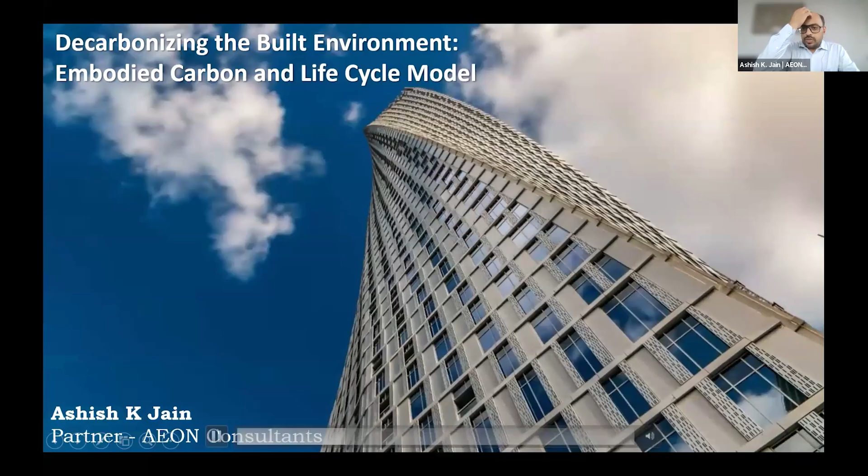I'm quite excited to hear all my fellow panelists here and the presentations which have been made. I think that's something which we all imbibe in the kind of work we are doing, and that's really the future which requires us to consciously think about things. In my presentation, the topic kept is decarbonizing the built environment and how embodied carbon and life cycle models are playing their role. That's what I'll cover.

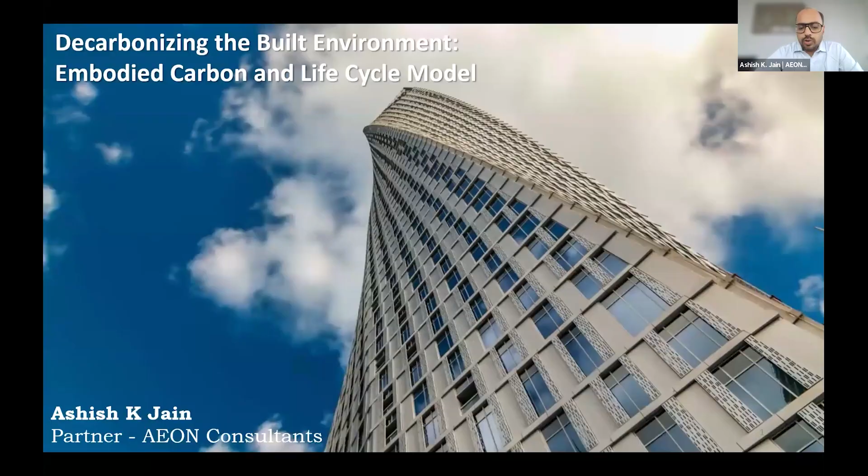Before I begin, we keep hearing about a lot of terms in this field of sustainability, and decarbonization is one such term which is quite extensively used, heard, and read at different places and forums and articles. It's important that as a community, we understand what it really means, the theoretical meaning of that, and how can we really use that in our projects.

So if you really go by what the word decarbonization means, it's a process of reducing CO2 emissions that contribute to global warming and climate change. We see a lot of these problems, which we've heard in the previous talks by the speakers also, the kind of problems that we are facing because of carbon emissions. And how do we remove them is what decarbonization is all about.

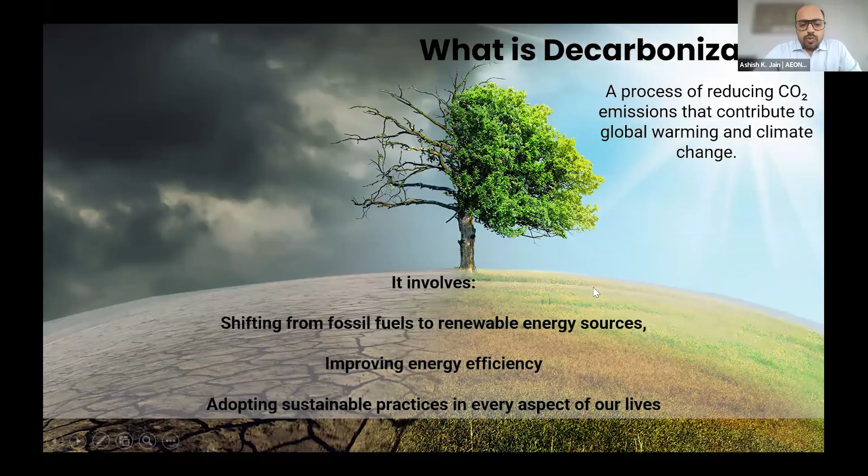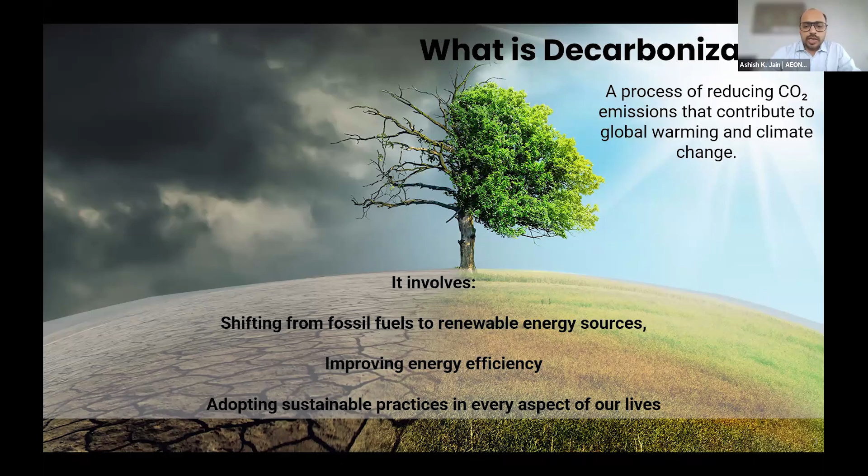When we talk of decarbonization, it involves shifting from fossil fuel usage to renewable energy sources. It requires improving energy efficiency first. So we heard about passive design, active design - all of those measures are really important to first of all reduce the consumption of our energy, which ultimately results in carbon as well. And then making sure that what we consume is more clean, adopting sustainability practices in every aspect of our lives. So of course we belong to the building, but buildings are one means of carbon emissions - carbon emissions happen in various aspects of our lives also, which is what we have to really see.

Now we may say, why do we talk about it and why does carbon matter a lot? Because these are some of the areas where carbon dioxide emissions are impacting us directly or indirectly. These are all the impacts of carbon emissions that we see. They're definitely contributing to global warming and the trapping of heat in the atmosphere, which ultimately is responsible for global warming and GHG emissions. We keep hearing about natural calamities here and there - those are somewhere related to all of these issues. High carbon levels also harm the ecosystems we have, not just human lives but the lives of all living beings. Biodiversity is being impacted, food security - a lot of these issues are there.

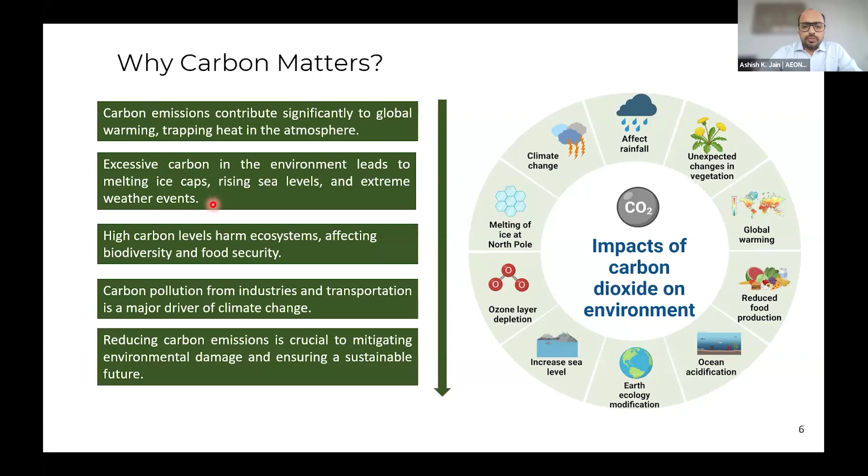Now when we look at the types of carbon, especially in a building context, there are two sets of areas to look at. One is embodied carbon and the other is operational carbon. Together they make whole life carbon - that's the overall concept that is required to be addressed properly. Embodied carbon, what you see on the left-hand side, is basically to do with a lot of the material selection and usage that we have in the process of building construction, while operational carbon is more to do with how much emissions are there in the operational part of the building. Embodied is related to the materials, manufacturing, transportation, and installation of all the materials, and operational is more related to the amount of energy consumption we have in the building.

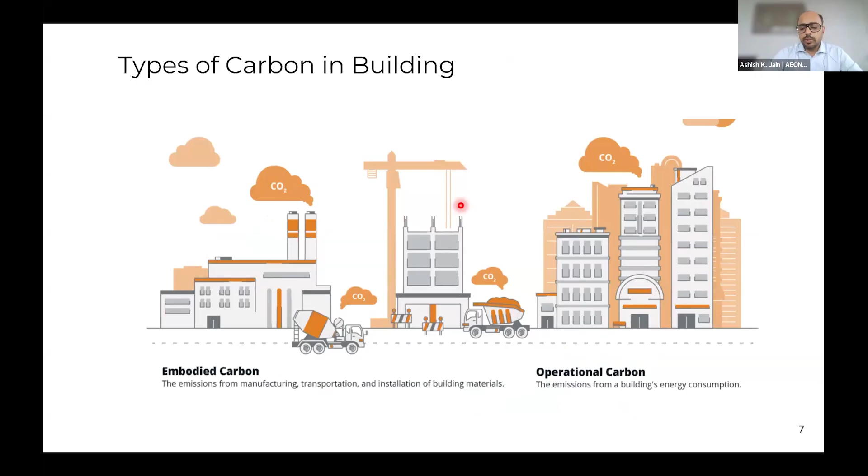When you look at embodied carbon, which is one key area of a lot of focus for any building, it's important to understand that between embodied and operational carbon, we still have leeway to manage operational carbon during the entire operational phase of the building. But what we build today is going to last for the next 40, 50 years for any building. So embodied carbon - whatever we consume today - is going to last for the rest of the life of the building. So it is very important to deal with embodied carbon first, and then of course look at operational carbon also.

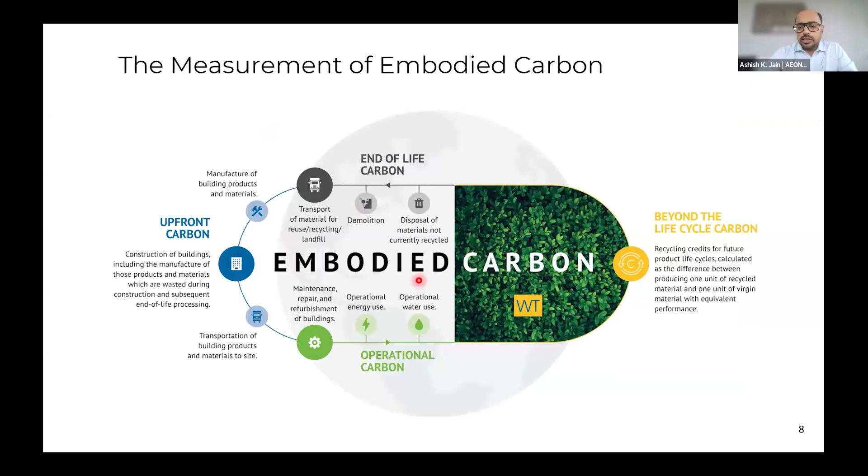Fortunately or unfortunately, there is a lot of work which is yet to happen in the embodied carbon area. There are a lot of materials present, but they may or may not be adequate enough to address all the building requirements for all types of buildings. Accordingly, we have to see and choose the kind of different materials which can be suitable to our requirements, and see what benefit we can bring in to the embodied carbon reduction.

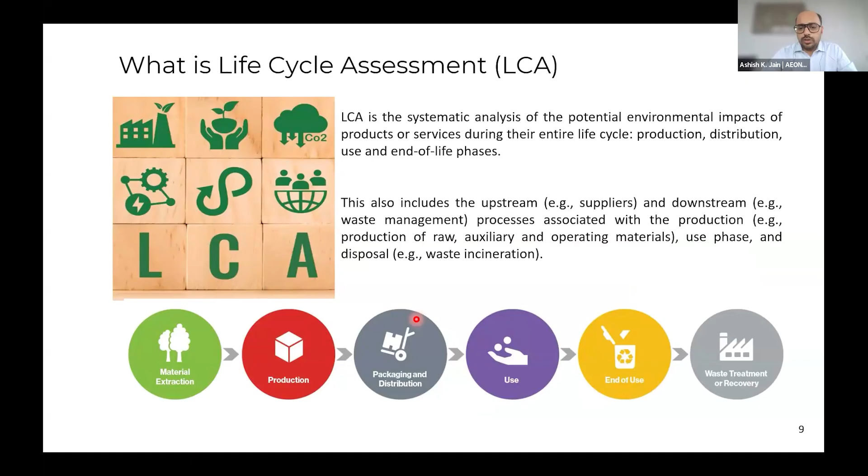There's a concept of LCA. I think this has been touched in some of the previous talks also. LCA is basically a systematic process of analyzing what the impact on the environment of any production cycle of the product or the building is going to be. So that's what the life cycle assessment is.

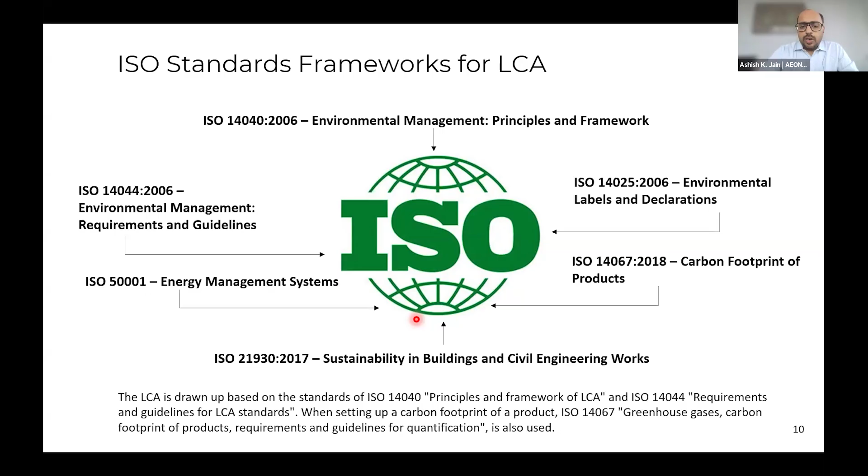There are different frameworks available for the LCA itself. ISO standards are available which define the methodology and the protocol of how the LCA should be conducted, and what it requires overall in terms of impact categories of life cycle assessment. This is what is shown here.

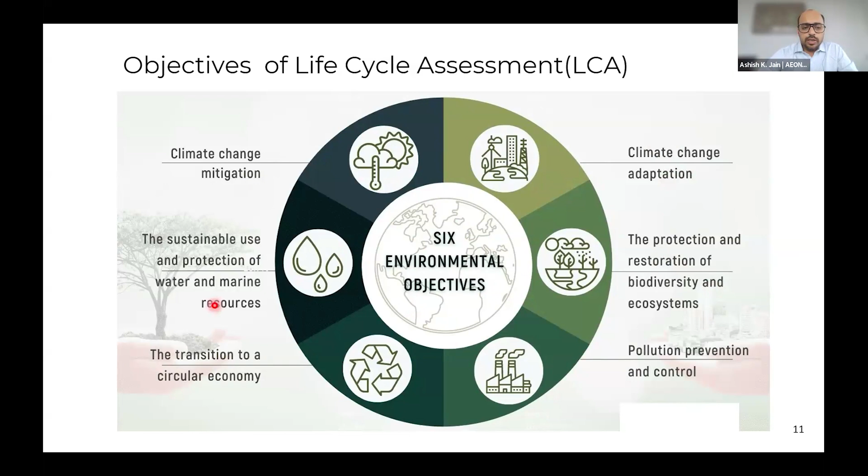There are 6 main impact categories where the LCAs are focused, and embodied carbon is also assessed for climate change adaptation, protection and restoration of biodiversity and ecosystem, pollution prevention control, transition to a circular economy, protection of water and marine resources, and climate change mitigation. These are the 6 main areas.

Life cycle assessments can be done at 2 different levels. One is for the entire building, the whole building life cycle assessment, and the other is for the product life cycle assessment. We use a lot of products in a building, and at every product level the LCA can be done to identify what has gone into the manufacturing of that particular product. Together, when the set of products make the building, that's where the whole building life cycle assessment is done, to assess how the environmental impact of a building and its products is going to be.

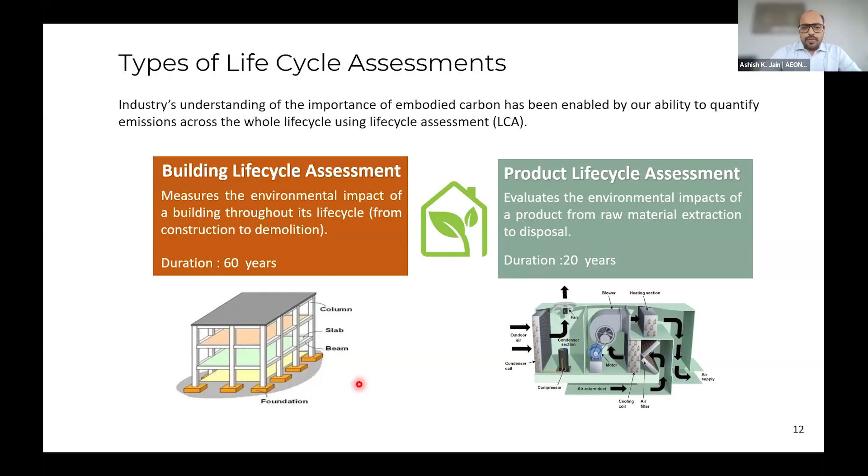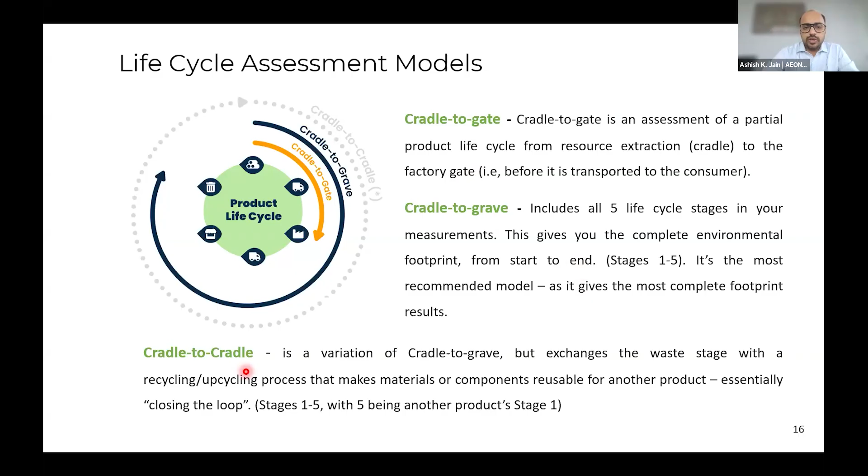Cradle to gate, just to give an idea, refers to the assessment of a partial product life cycle from the extraction to the manufacturing facility's gate. So whatever happens before the product goes out is measured in cradle to gate. Cradle to grave is from the start to the end of the particular product's life, and cradle to cradle is the entire loop of the product being taken into the cycle of manufacturing, end of life, and refurbishment. These are different stages.

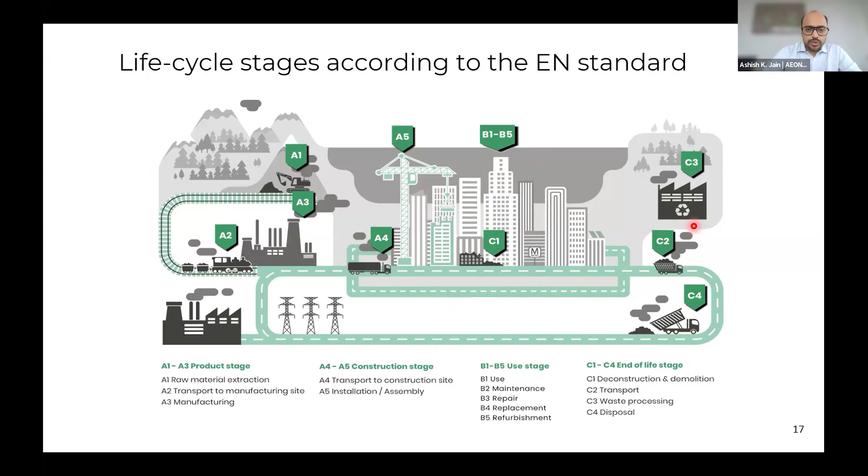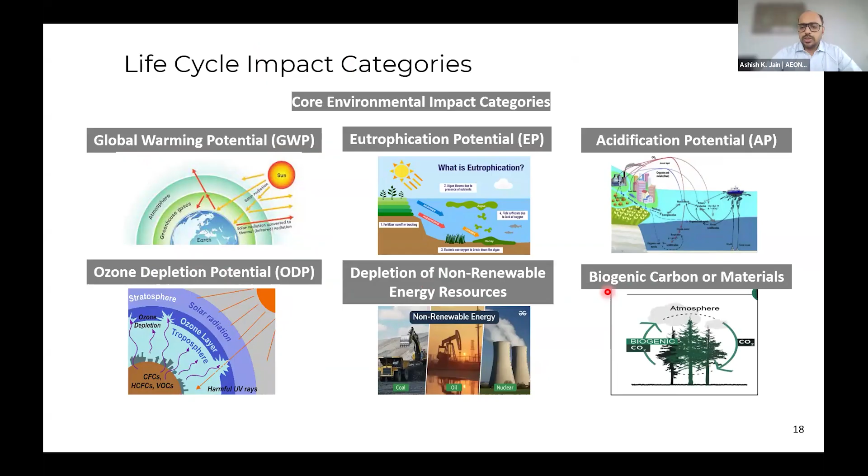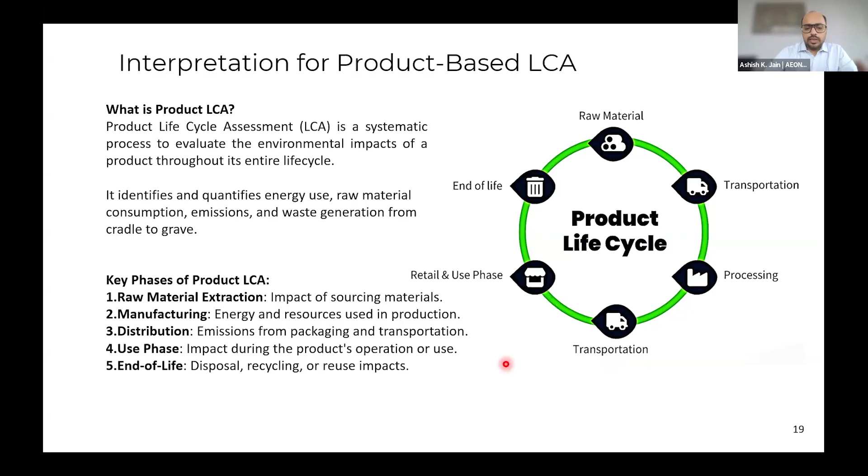As I said, there is a product-based LCA also available, that is basically to map the overall inventory and the carbon emissions from the manufacturing of a product.

As a byproduct and as a result of the LCA exercise, the impact categories that you have analyzed lead to something called environmental product declaration. It is nothing but a document which tells you what kind of impact has been made in the manufacturing process of a particular product.

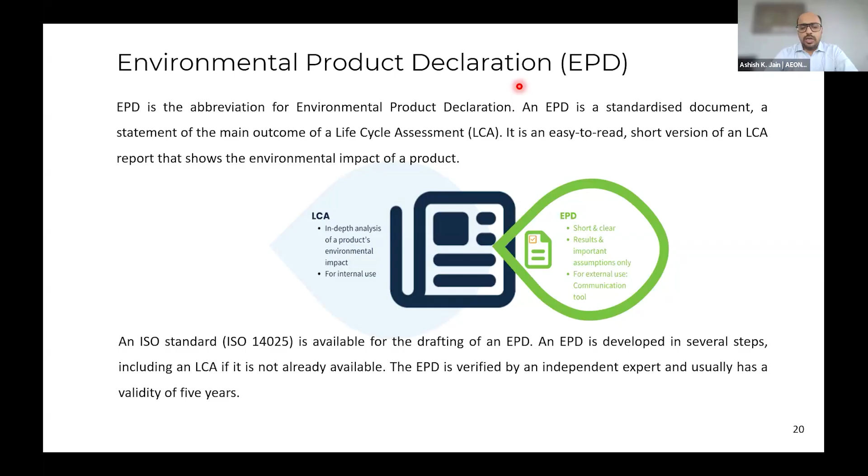So a simple item we can keep a check on if we really want to assess the embodied carbon of a product or a building is to choose the materials which have got EPDs available for them. That will help you analyze the carbon footprint and embodied carbon of the building in a much easier, simplified, and more verifiable way.

There are different certifications available for buildings, like IGBC, LEED, GRIHA, Edge, International Living Future Institute. They all do their own assessment.

What we have seen is the direction which green building rating systems have given to the industry is a much more streamlined process, from architecture to construction, so there is a set structure which can be followed. How much do we follow, what do we do, is something that depends on the project type and the team's capabilities. But this is the framework available.

Overall, today we stand at number three in the world as far as green footprint is concerned, which is good but not enough. We have to do a lot more because the construction yet to happen in our country is humongous, and there's a lot more which can be done.

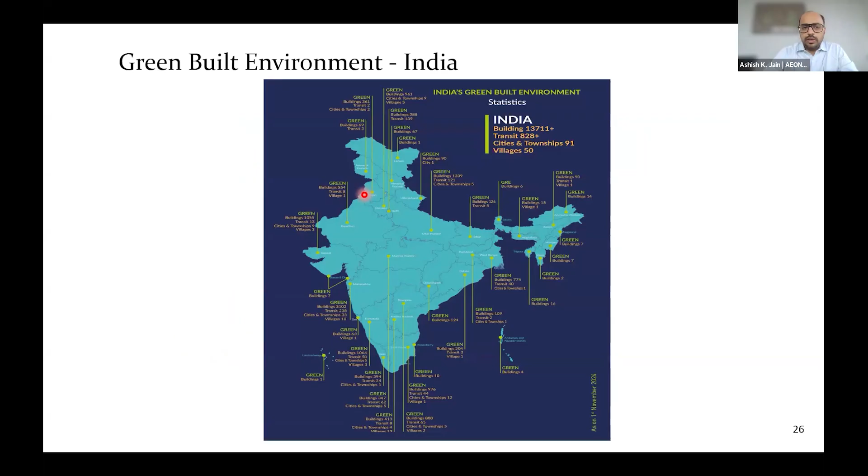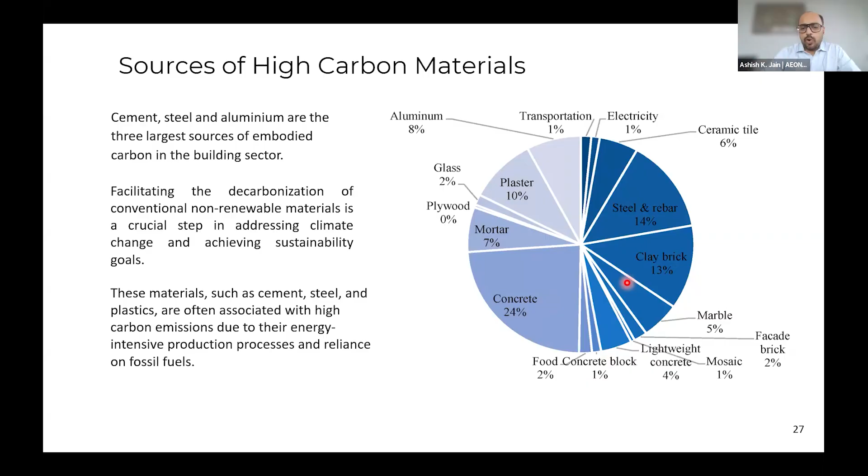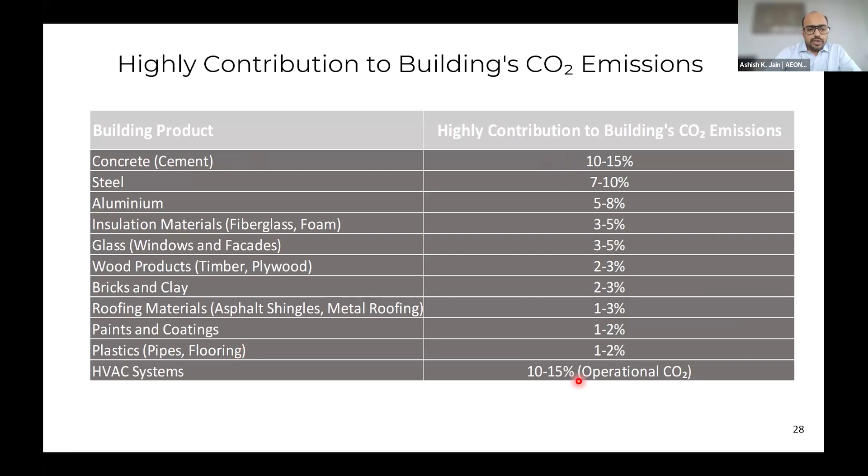If we are able to control these in a building, we're in much better control. These are some of the percentages you see in different materials, how much the CO2 emissions can be identified. I'm not going into details because the time is short.

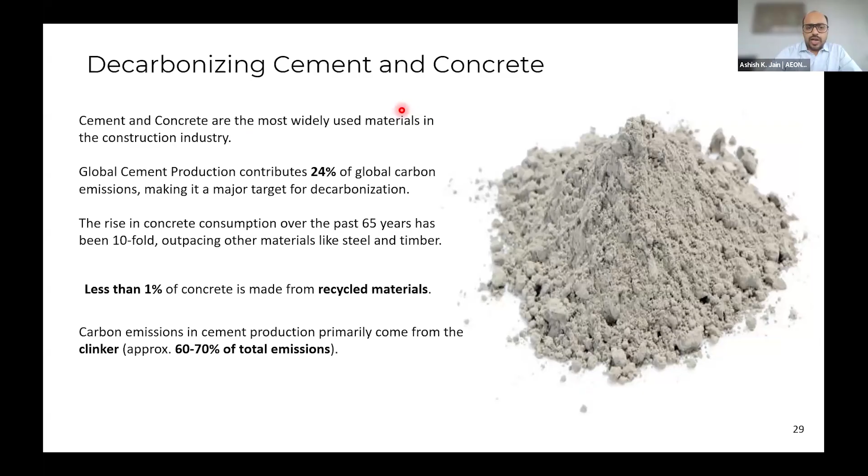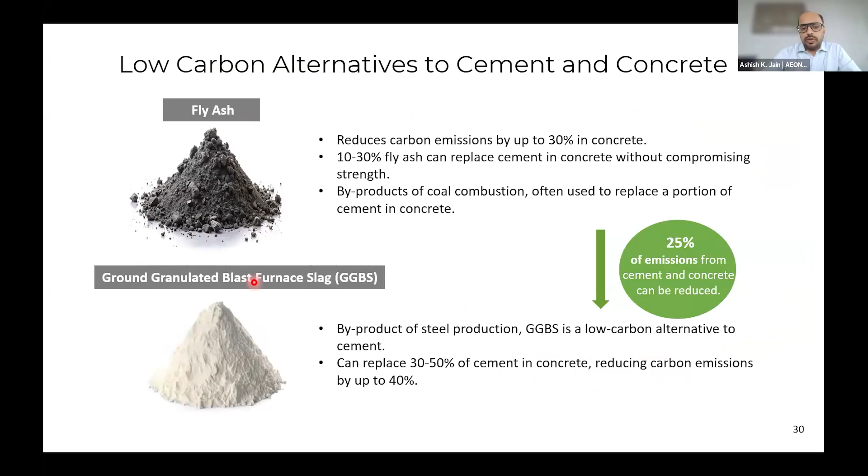Concrete is one biggest item to be looked at. How sustainable is that? Fly ash is one good alternate. GGBS is another alternate which can be used in combination with the kind of concrete we make, and also the blocks that we use for the building.

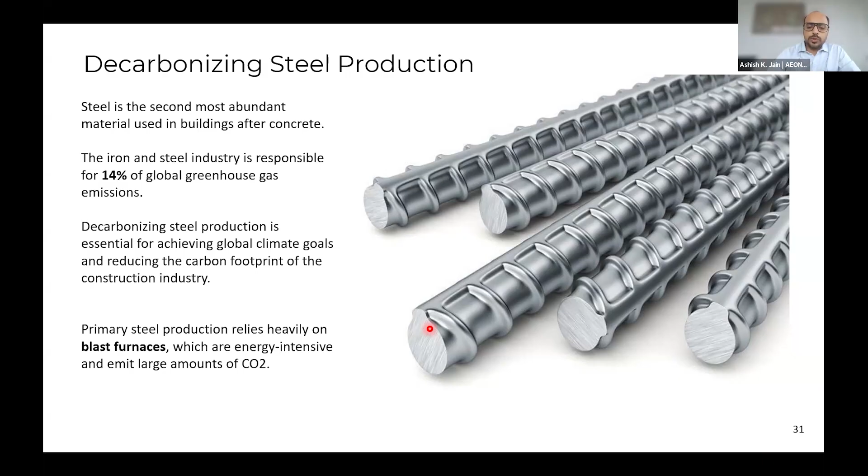Steel, there's enough alternates available in low carbon steel options as well. We have to see how best we can use it without compromising the building strength and quality. Wherever is the best area to utilize more recycled steel, more green steel, those are options. It's up to us how best we use that, and there's a good amount of reduction that is possible.

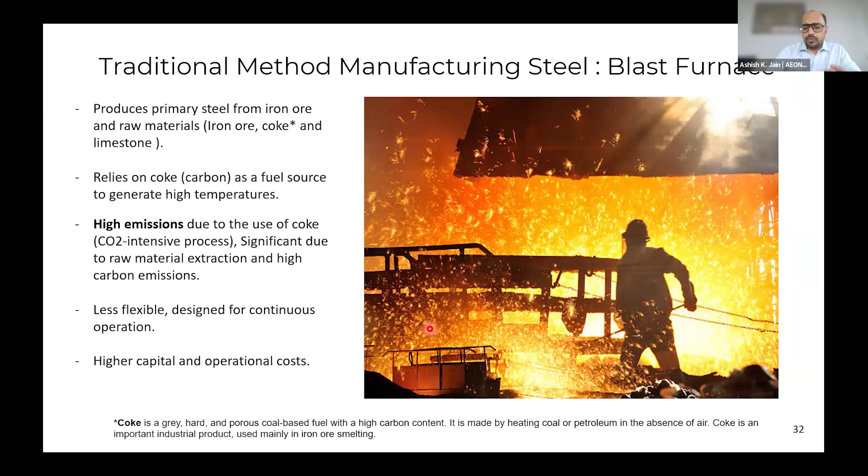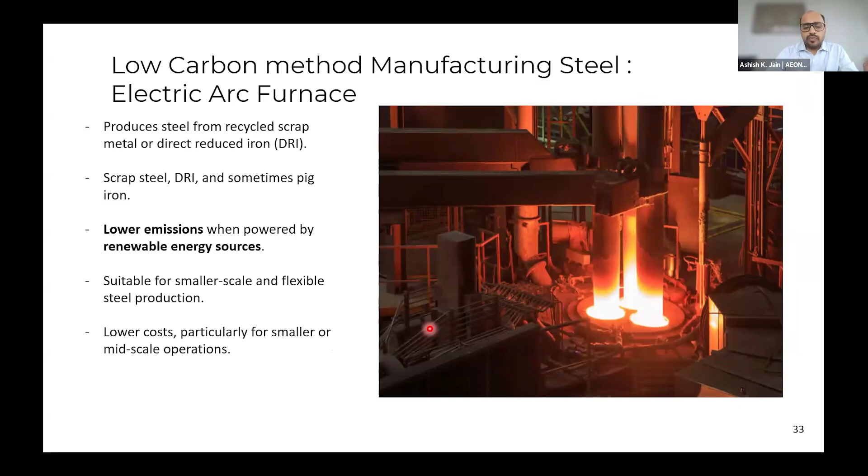Traditional method of manufacturing steel used to be blast furnaces, which is very intensive in terms of energy and embodied carbon, which is getting shifted to electric arc furnaces in newer systems. That's where a lot of reduction in emissions is able to be achieved.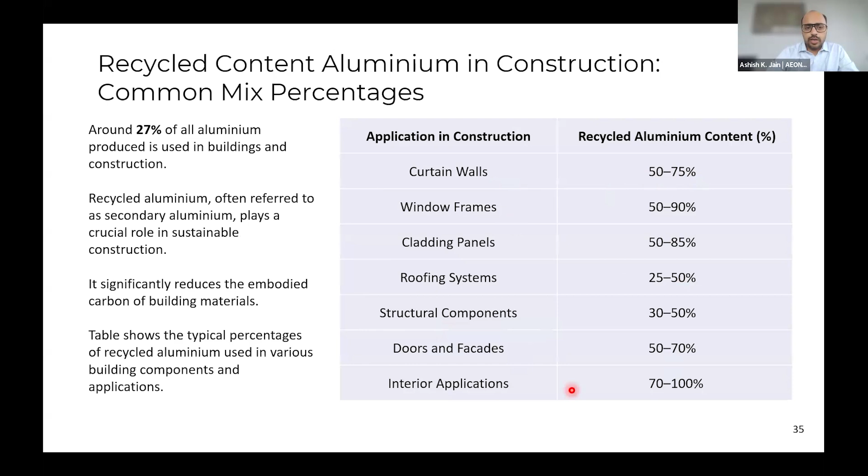Aluminum production is another big area of carbon emissions. These are some of the areas where we use aluminum, and the recycled aluminum content which we can really look at. Glass is another one, approximately 1.5% of global CO2 emissions, so we have to consciously use it.

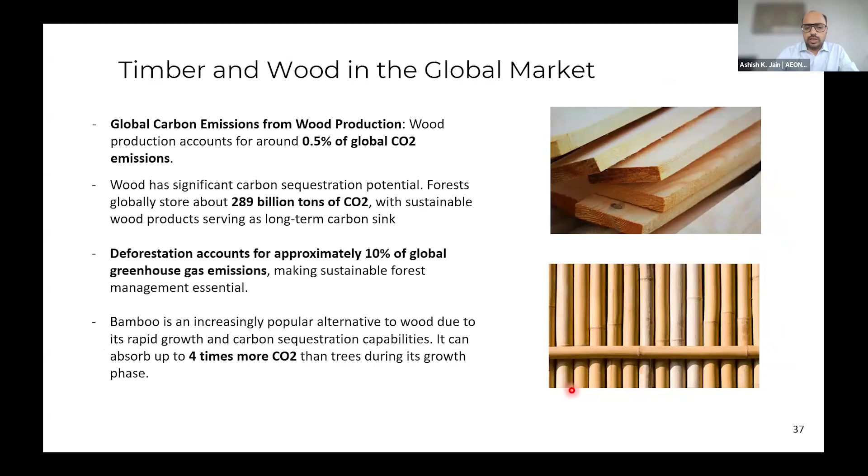Timber and wood is not too much used in Indian construction, but it does have a fair share of use in other parts of the world. It also has around 0.5% of global CO2 emissions. Instead of red bricks, there are good alternates like fly ash and AAC blocks, which can be used where carbon emissions can be reduced.

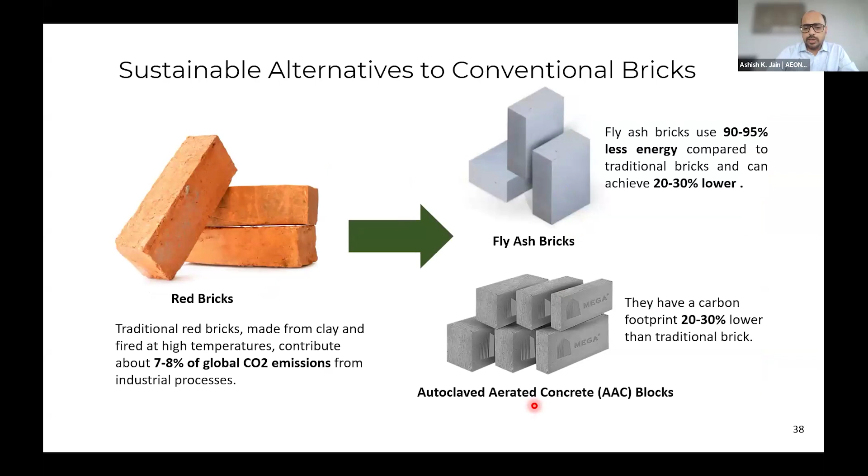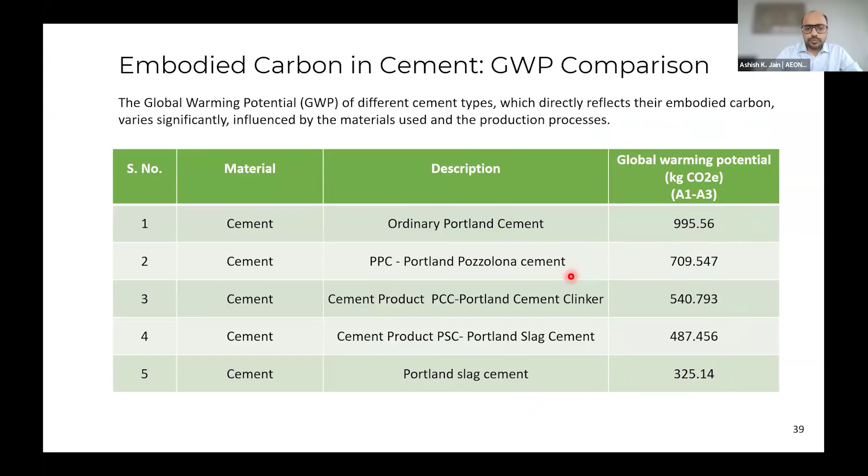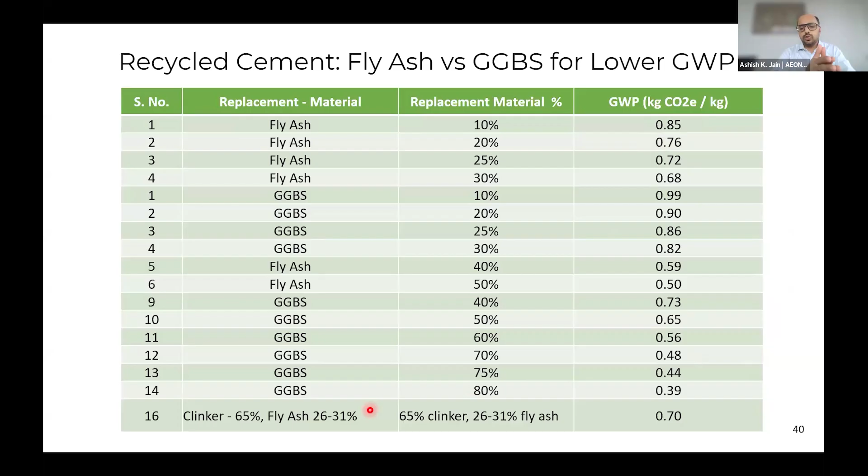These are some alternates of cement where global warming potential significantly drops down as you choose different alternates, from 995 to 325. There's a potential rise between these products. Fly ash, GGBS, the replacement material - how much can you replace in your concrete, and how much will it really help GWP? The higher the content of these alternate materials to your RMCs, the better your carbon footprint for that particular product.

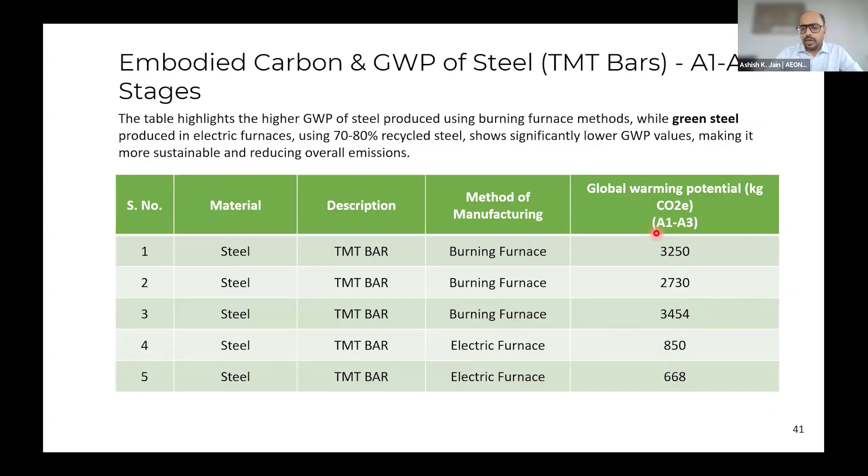Steel burning furnaces versus electric furnaces, you can see the amount of difference it can make in overall CO2 emissions. Just in the interest of time, just last two slides.

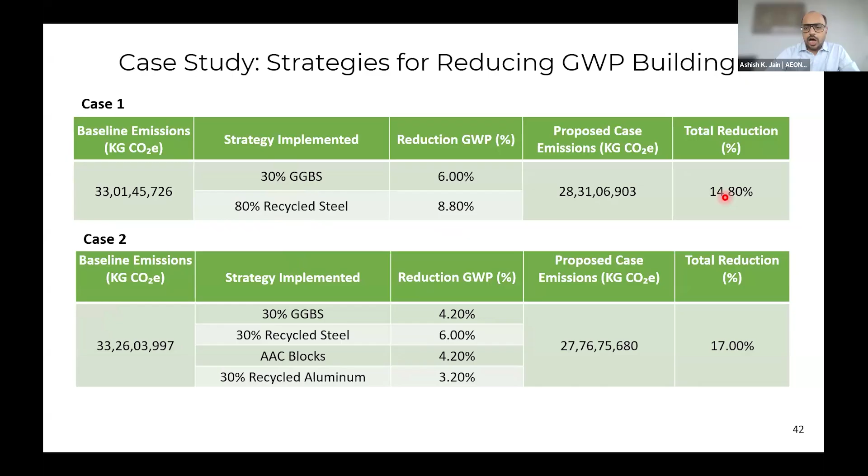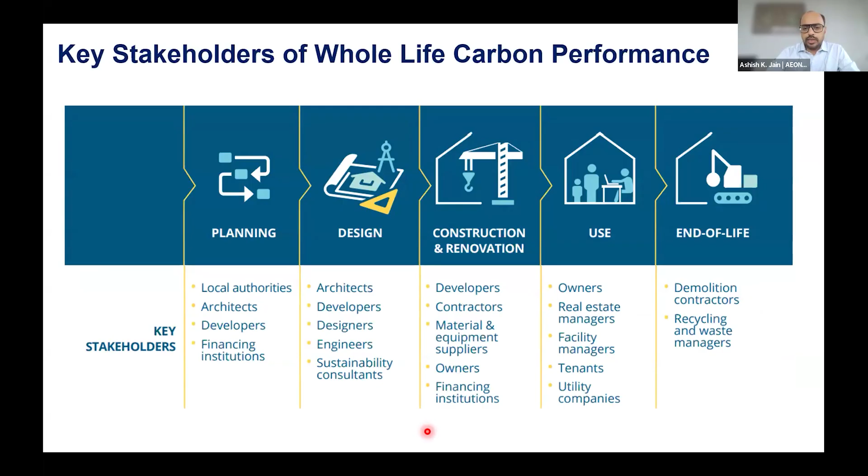So overall, if you see the key stakeholders, everyone is responsible when it comes to whole life carbon performance. Everyone has a contribution to make, and that's where it's important that we holistically address the carbon emission problem. This is where I would like to end. Thank you.